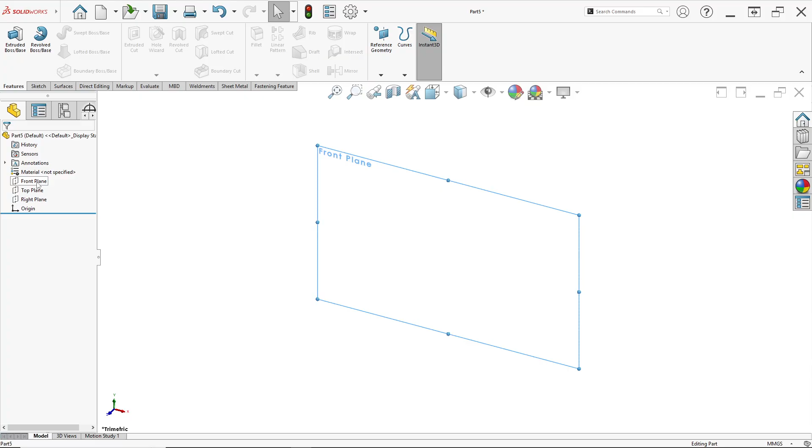We start drawing our front view, so right click on the front plane, click sketch, choose line, and draw the line like this, this, this and this. Ensure you draw the sketch like this for the line, and set the dimensions.

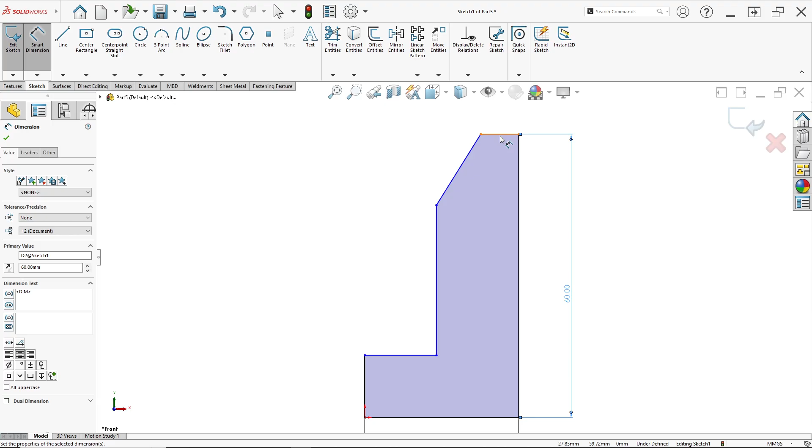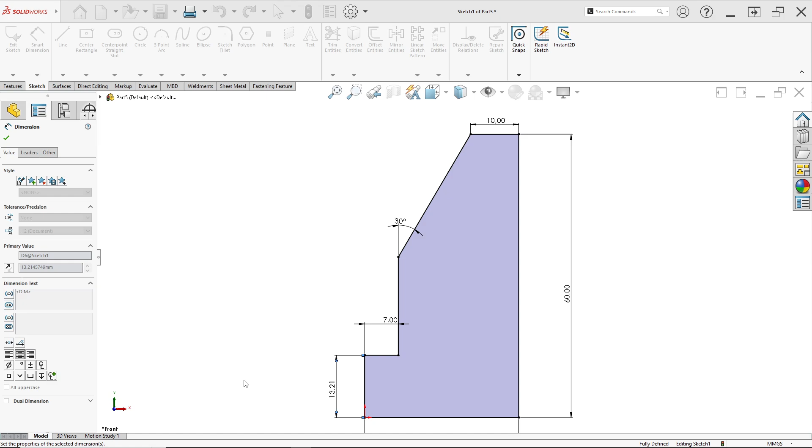This line has width 32 and this line has height 60 millimeter. This line has width 10 millimeter. This line and this line have an angle of 30 degrees. This line has width 7, and the last line has height 12 millimeter, like this. Ensure you input all dimensions like this for the first step, and then we can extrude to solid parts.

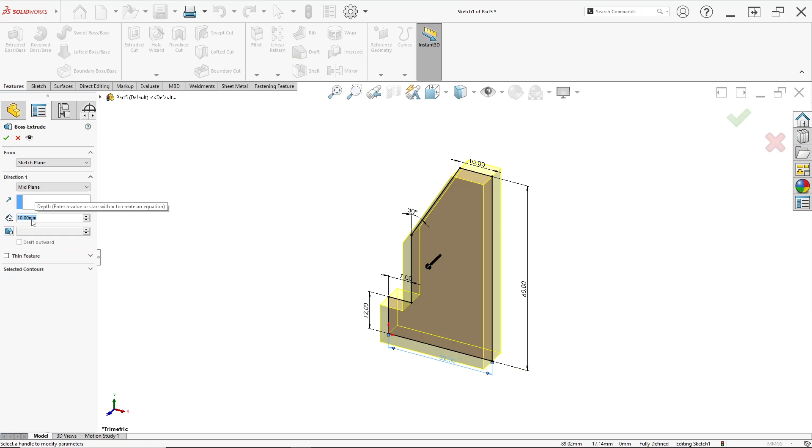Select feature and click extrude boss. We can see the total width of this part is 45. For direction, select mid plane for a symmetry part, and for thickness or depth, input 45 millimeter, because the thickness is 45 millimeter on the width. Then click OK, like this.

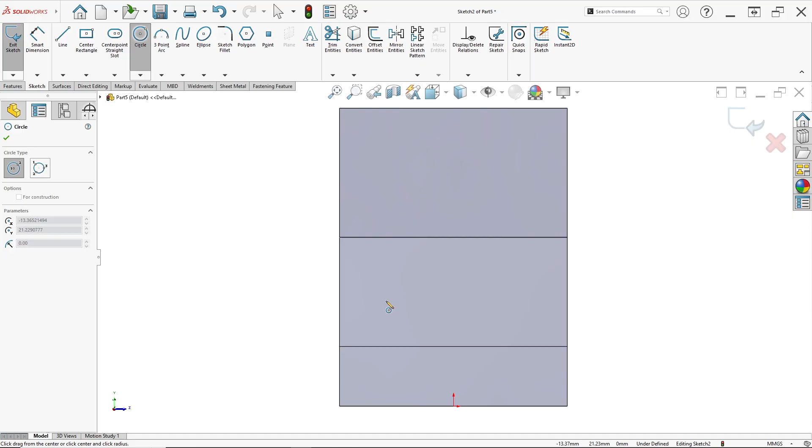Don't forget, here we have two holes, 2 by diameter 8. So right click on this face and click sketch. Select circle like this and set the dimension: diameter 8 millimeter. For distance, this point to this edge has distance 9 millimeter, and this circle to the bottom edge or bottom face has distance 24. So input 24 like this.

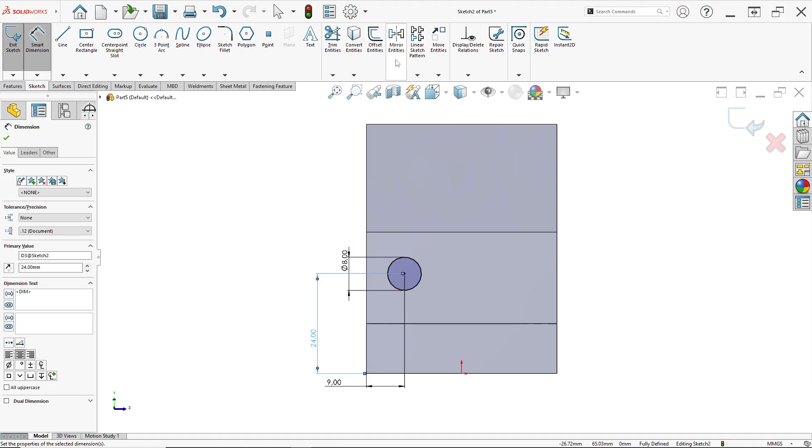We can see here we have another circle, so we just choose mirror entities. For the entities to mirror, select this circle, and for mirror about, select the front plane. Click OK. We can check the distance here, the circle is at 27, which is correct, matching this drawing's 27.

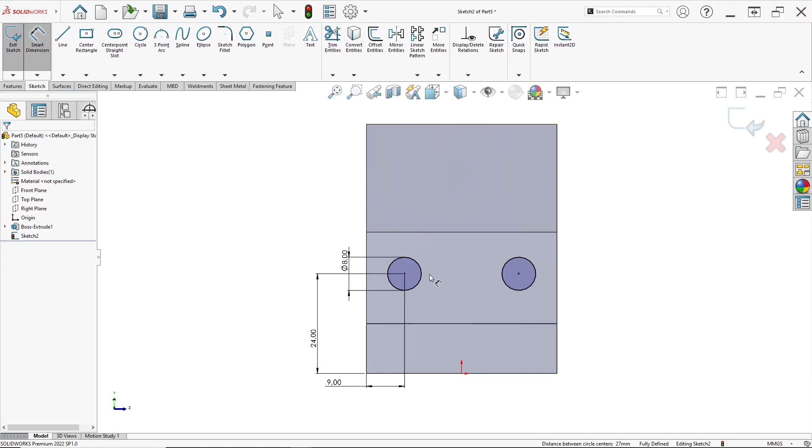Now we want to make holes from the circles, using the feature called extrude cut. Just click extrude cut, and for direction we can see here it should be through all. So select through all, then click OK, like this. It's so simple.

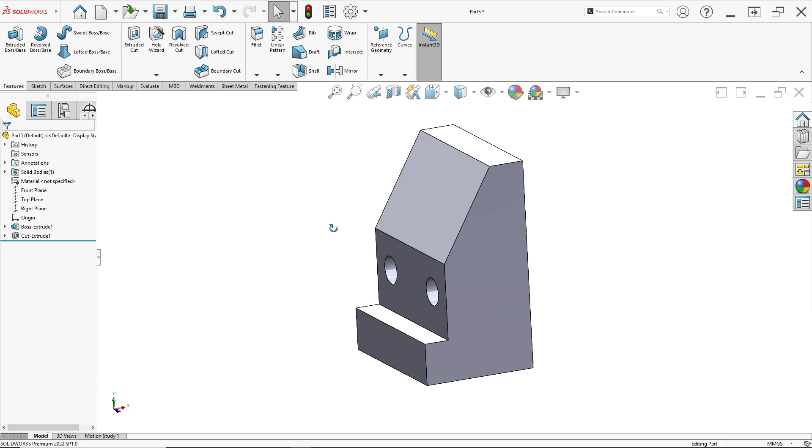After that we make two more holes, two circles. We make these with the mid plane here at thickness 12 millimeter, the sketch like this. So select the front plane again, right click on it and click sketch, then choose circle and draw two circles like this, setting the dimensions for them.

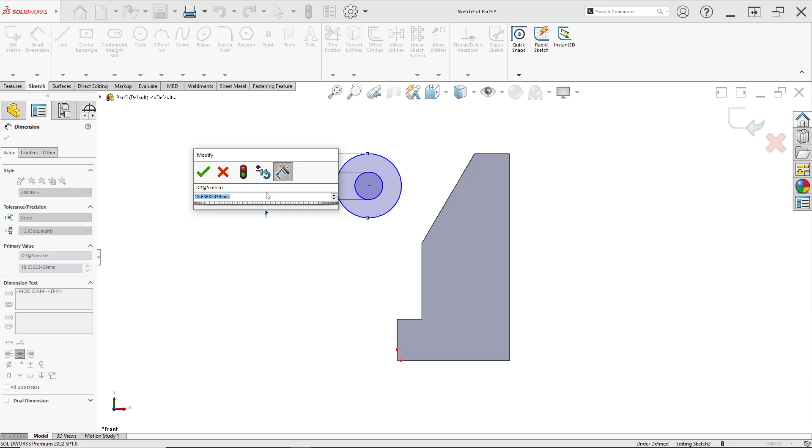The first circle has diameter 8 millimeter, and the second circle has radius 10, so its diameter is 20 because the radius is 10 millimeter. The diameter is 20 millimeter.

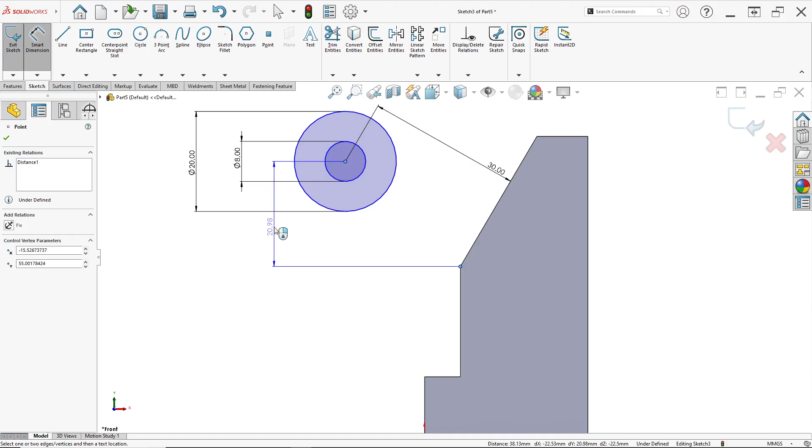Set the distance: this point to this line has distance 30 millimeter. And this point to this point of the circle has distance 20 millimeter like this.

After that, we make a line, drawing from this line to this point and until this point, and draw again a circle to this circle. Select this circle and this line, then hold Control on your keyboard and click the circle, and choose make tangent. Again click this line, hold Control and click this circle, and click make tangent.

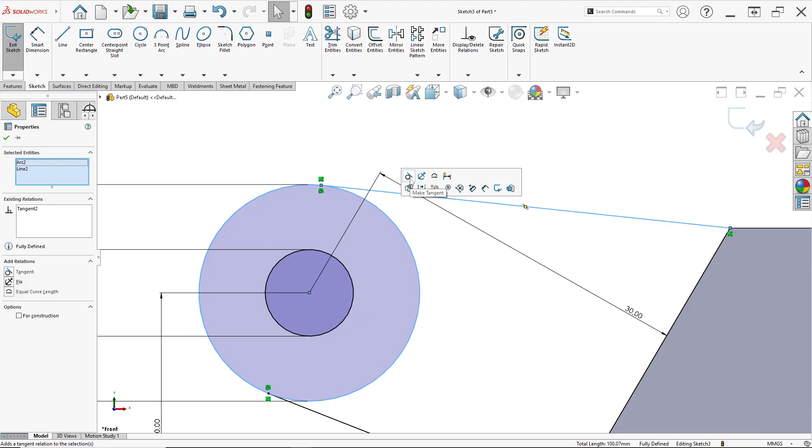After that, we trim entities for this circle, then give it thickness or extrude to solid part from the sketch with 12 millimeter thickness. Select feature and click extrude boss. We can see in here, and for direction change in mid plane.

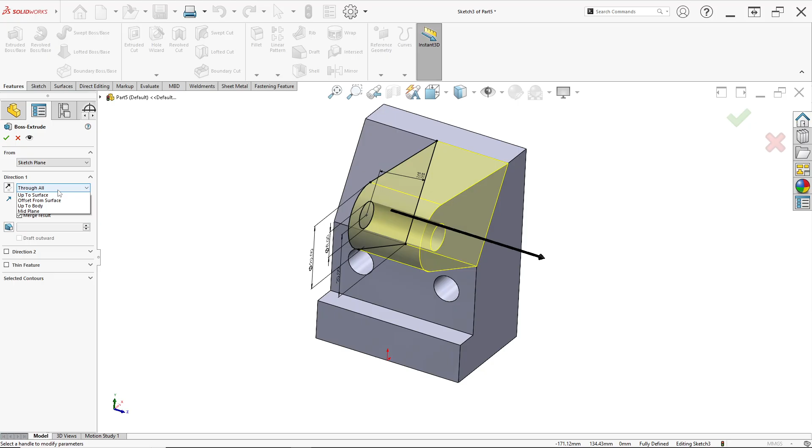For thickness, input 12 millimeter like this. Direction is set to mid plane because this is the middle of the part, with 12 millimeter thickness. Just click OK and done like this.

It's so simple. Here we can see again the shape or sketch. There are two identical parts in this sketch, so we just make one.

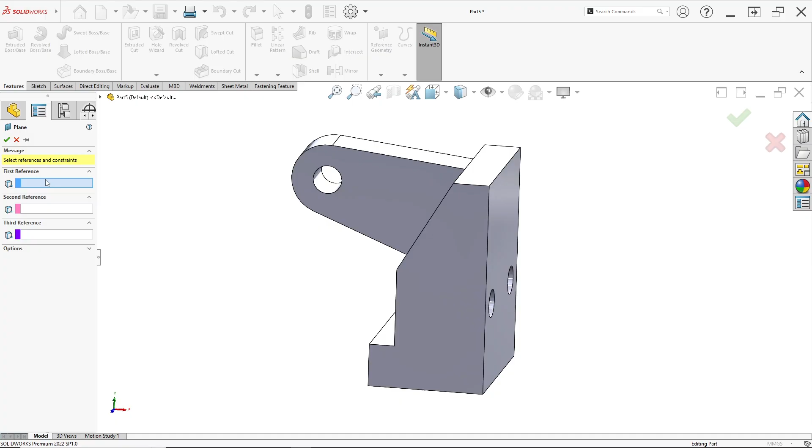After that we mirror. Here we have a distance of 6 millimeter from this face to this face, so we make a new plane. Click feature, then reference geometry, then select plane. For the first reference, click this face, and set the distance offset to 6 millimeter.

We can change the direction here. Just click flip the offset direction checkbox and click OK. We just made the new plane, named plane 1. Right click on plane 1 and click sketch.

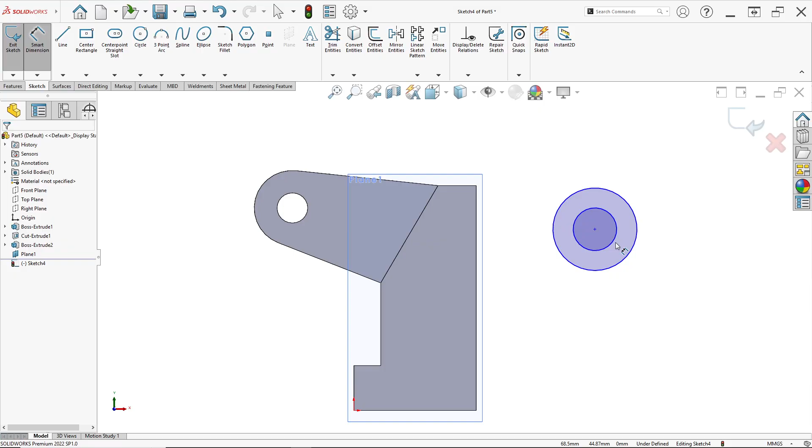Draw a circle here, two circles actually. The first circle has a diameter of 10 millimeter, and the second circle has a radius of 10, so the diameter is 20.

For the distance from the center of the circle to this edge or face, set it to 30 millimeter, so this point to this edge distance is set to 30 millimeter, and we can see it is horizontal.

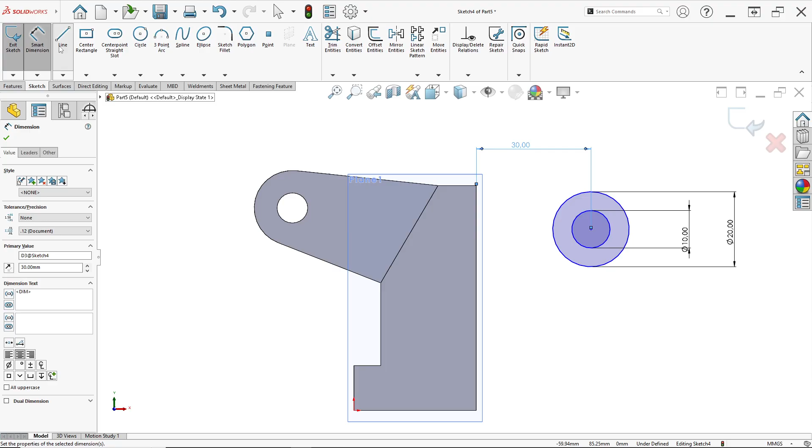Connect this line from this point to this circle. Select this line and control-click this circle, click make tangent, then right click on this line and click make horizontal. We can see it is now horizontal.

After that, select line again and draw from this point to this and to this circle. Select this line and this circle, click make tangent.

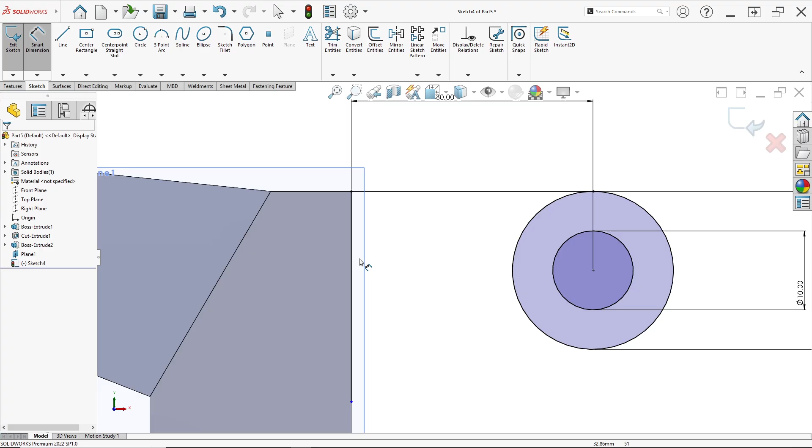Sorry, we can Control Z and repeat. We do trim entities here. We set the dimension here first, which has a length or width of 30 millimeter.

Input 30 millimeter for this line, and draw a line again from this point to this circle. Select this line and control-click this circle, click make tangent like this.

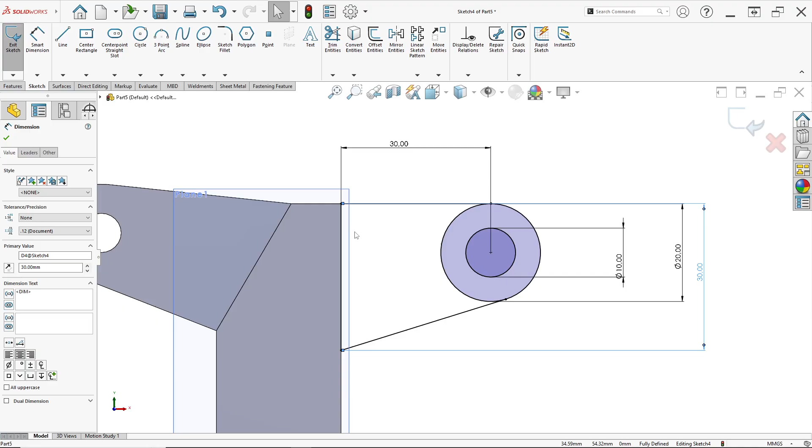After making the sketch like this, ensure you input all dimensions: 30 millimeter, 30 millimeter, and like this. We can do trim entities for this circle.

Click feature then extrude boss. For direction we can change to blind, but here we can change the direction with reverse direction, and the thickness is 10 millimeter, so input 10 millimeter here.

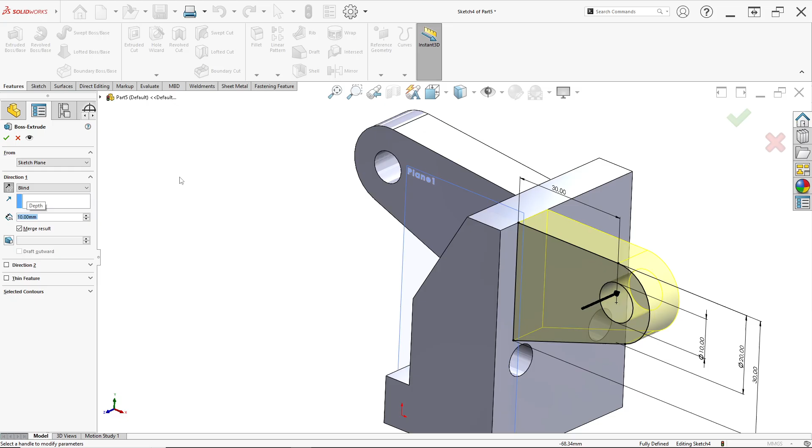Click OK, and we just make another sketch like this which we will mirror. First we hide plane 1 by right clicking and clicking hide.

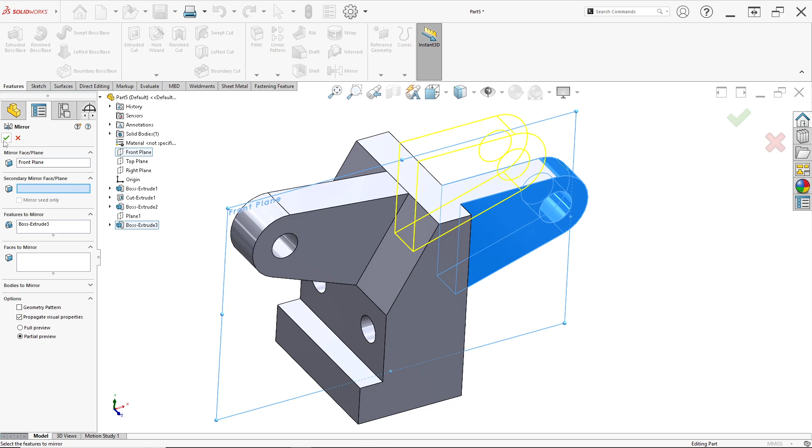After that we select mirror under feature, click boss extrude 3, and for the mirror face or plane just click front plane. Click OK and done. We can check the distance here, which is 13 millimeter.

Click evaluate and measure for this face to this face, and the normal distance here is 13 millimeter. It's correct. We can close.

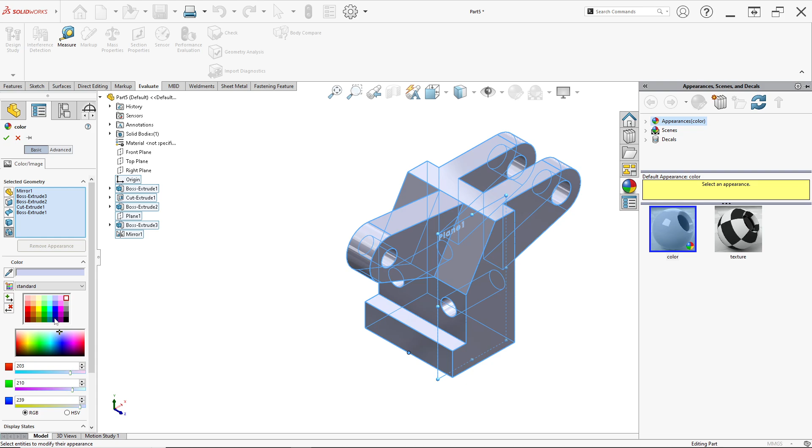We change the appearances or colors. Select all features, click this icon, add appearances. For color you can click yellow, and select again for these appearances, click this face and click white. For color this hole, this hole, this hole, this hole and this hole.

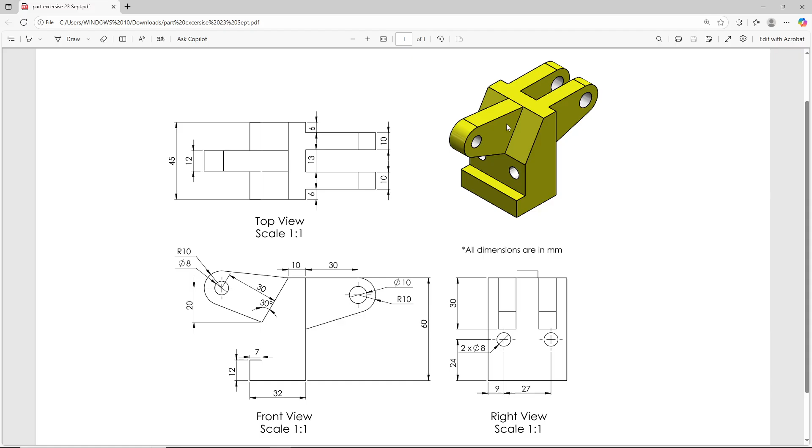Click OK and done. We just made a simple part in SolidWorks, applying this drawing with yellow appearance and white in the holes. I apologize if there are any mistakes or errors in this material.